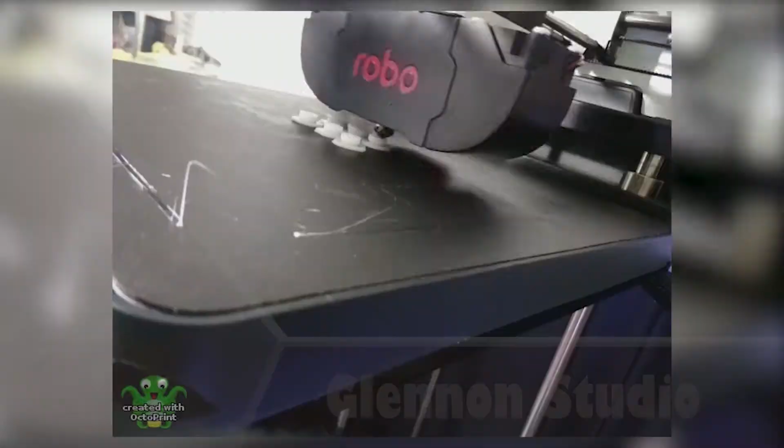What you see in here is the actual print process of printing all the pieces. Some of them I failed, some I reprinted, some I addressed. I ordered the electronics I needed off of Amazon.

I'm not using the same components that they use in the OpenRC F1 series. I'm using similar parts, obviously. It was just easier for me to source them on Amazon than on a website where I'd have to create a login and all that.

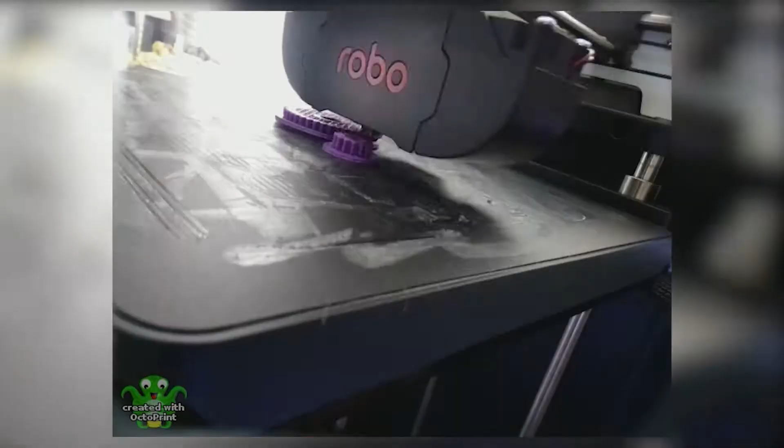So with that said, the engine I picked is a smaller engine than what they're recommending, and this is where I'm going to run into my first problem. Let's talk about that as soon as we're done printing everything.

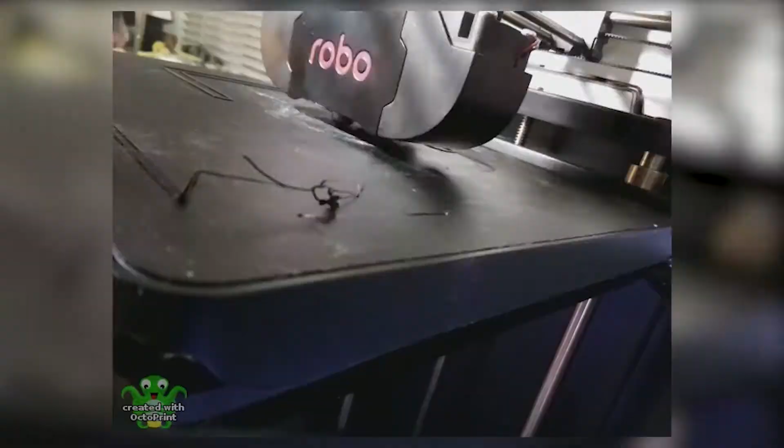Jumping into Fusion here. Unfortunately, like I said, the engine I chose was a smaller engine, so it does not match up with the engine mount that they have.

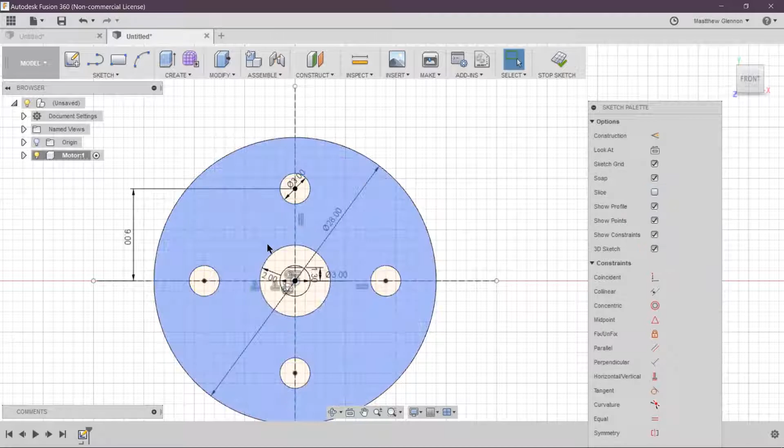This is where one of my first frustrations with this project is going to come into play. I wouldn't say frustration, but concern. The engine I have is a bit smaller, and it doesn't fit their configured mount.

So what I'm doing here is building the engine, so I have a reference point to work from. Obviously this is just a mock-up - it's not critical, but it is important that I have a good reference to work from.

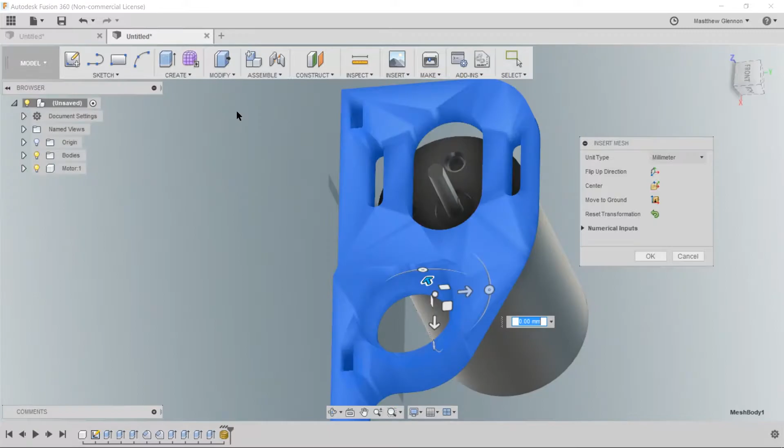Now I'm bringing in the component that I need to redesign, and I'm going to end up having to recreate this piece to get everything lined up.

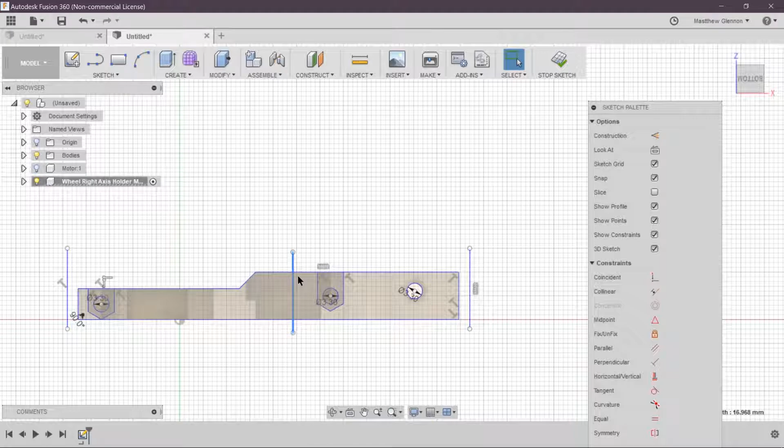My concern here is that they don't have any source files to work with to make these adjustments. The concern will end up being whether the axle is lined up straight or not. That's my only issue here.

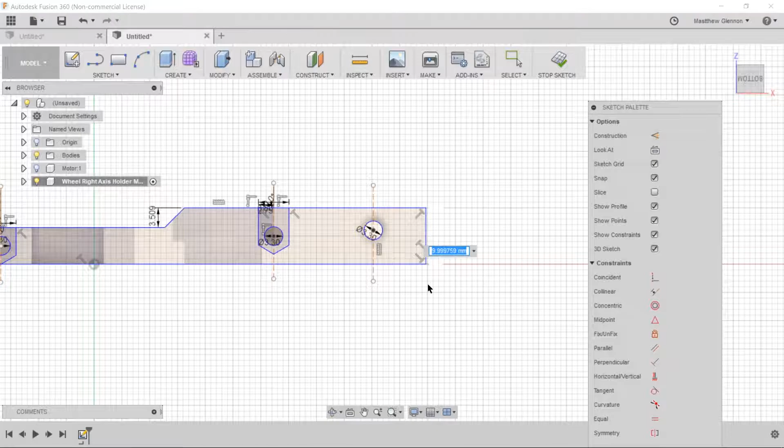The only thing I can do is live with it and go with what I got, and that's what I'm going to do. Luckily, in the end result of this, everything came out perfect after the second round.

I got the hole for the axle lined up pretty nicely right off the bat. That didn't look like there was much of an issue there. Obviously it's hard to tell either way if you're very little off or not. We'll just live with what we got.

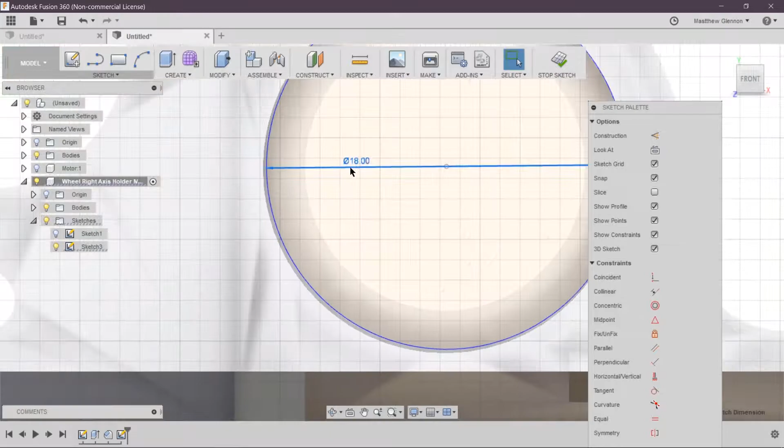Then the next issue I have is how to set up the motor mount to work with the components that I have. So we'll let that run, and I'll go over the end results of this part at the end of this part of the video.

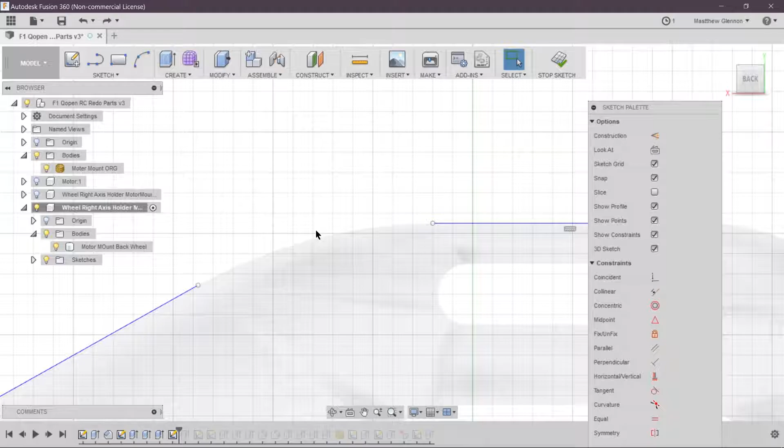Now that we have our car printed, everything printed, let's take a good look at everything here. So everything looks pretty good printed here.

We've got the cover. I already put the camera mount, whatever they call it, on top, which just slides in and locks into place, which is nice. I don't want to fiddle with that because you don't want the plastic wearing down.

Now, the components I chose, we'll look at that in a second. So the pieces look good - I used a raft, so I sanded all the roughness down, as you can see there. On those, that's the nose piece.

Now I ran out of screws, so I'm waiting on some more screws. So I have some temporary screws in some parts and areas and not others.

So let's move all these components out of the way, and we'll take a look at some electronics that I've got. And we'll take a look at that motor mount while we're at it.

Alright, so these are all the pieces. They're shifted out of the way. Alright, so this is where we're at on the build.

I've got a temporary screw in both the back wheels. Got only one done in the front because I have temporary screws here and at the bottom. And if I try putting the wheel on, it won't fit properly.

Alright, now if we look at the engine here, they really didn't design enough space to work with different engines. I'm going to run into a little bit of a tight space here with this particular engine. So I might readjust how I have the engine placed in, because having this far back hitting the wall is not the best thing to do.

Alright, so I'm using a smaller engine than what they particularly use. Some people might actually want this - like if they're making this for their kid or something, they want the most powerful thing that they can get their hands on. Alright, so with that said, let's take a look at the other part that I ended up redoing.

I redid the gear. I ended up putting it upside down. I was having problems, so I clipped some of that off so the wheel wouldn't be in the way.

Things I had to pay attention to was this curve up here, making sure the screws stay flush with that so nothing interacts or gets in the way of each other. Alright, so that's the engine.

I'll give you an idea of what it is when I get in the description. It's a brushless DC motor. Put the wheel so it doesn't fall. This is the controller that it came with. So we've got a T connection for the battery, our standard servo connection, and 3 wires going to the motor.

The other thing I picked up, just in case I needed it, was, hold on, I buried it with the parts to the car, this little programming controller. This little guy to program the controller here.

So we'll open that up, take a quick look. From what I can tell, you got a few buttons here. This guy plugs into our friend here, you just got to make sure everything lines up properly. And yeah, that should fit, but apparently it does not. Interesting, you'd think that, considering that's supposed to be a standard fit, that would work fine. Whatever, I'll take a closer look at that later.

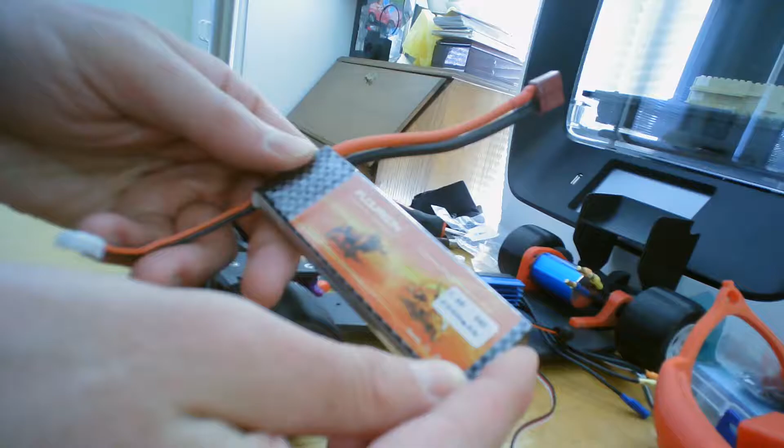Then the battery I picked up was this little guy here, because anything bigger was going to be really tough to fit into the car itself. It's a 2200 milliamp hour 2-cell battery. It's got the T connection, so I don't have to worry about adapters. I'm waiting on the servo and the controller and more screws, and once I have all those, I should be able to do that.

And in comparison, actually, while we're at it, I originally picked up this big beast of a battery, and that was my mistake, it doesn't fit. It's not going to fit into the car, so I ended up purchasing this little guy. I'll save that for another project.

Now, to charge everything up, I picked up this guy here, the B6. I don't know how good it is. I've not used any of these since I was a kid, and they weren't this fancy.

So let's move the car out of the way, and we'll take a quick look at the charger. Excuse my chair. Excuse all my little parts and bits and pieces for the car.

Alright, so we'll take a look at it. I haven't really opened this. I haven't really looked at much of it.

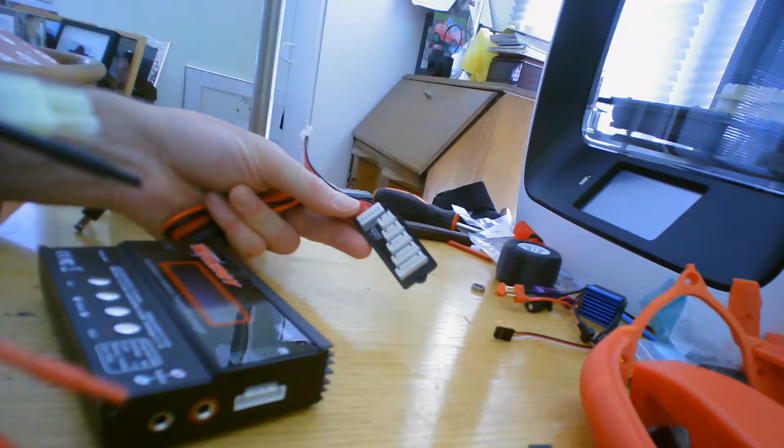Interesting, so we have this little adapter board for, I guess, different plug styles for charging, is what I'm assuming. Gator clips, that's interesting, probably has some use. That goes with that guy, so whatever. And I don't actually see, oh no, I don't see a T connection.

Then we have this monstrosity to address a variety of charging types, but I don't see a T connection, unless that's this. Oh, there it is, it had a little cap.

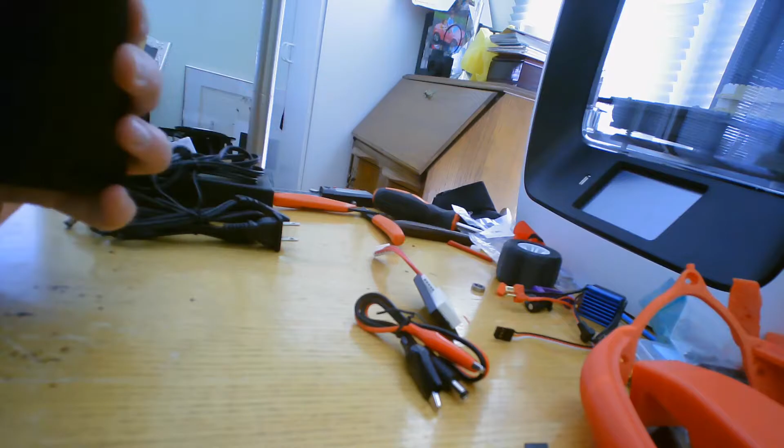Alright, cool, so I guess all we do here is plug this stuff in on the side here. Cool, and I guess this would normally go here if you need it. Again, I have no clue what that's used for, so don't ask me.

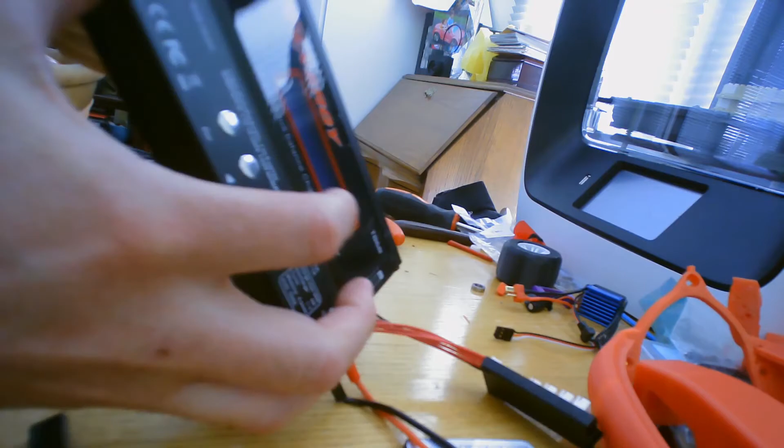Oh, that's interesting, so apparently, and I don't know why that is designed that way. Let me undo this. Why would you want this to plug into mains? See, this is designed to go right here, and then you can clip it into a main power. Why would you want that, especially when they're providing you with a nice quality brick like this?

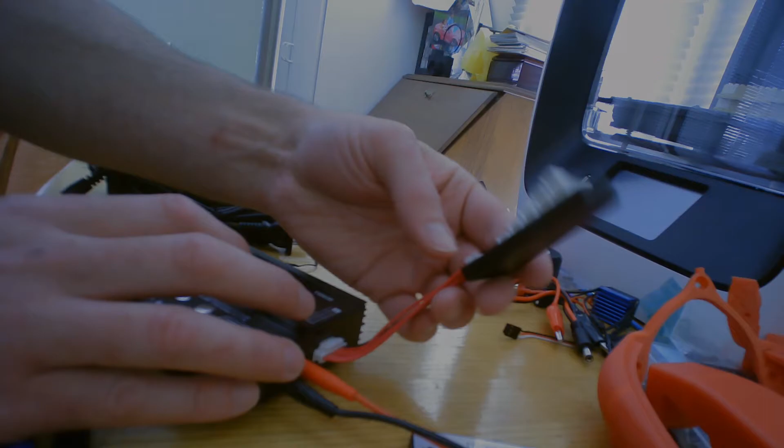So most likely I won't be using that. And as far as the adapter goes, I'm not going to need that, so I'm not going to even worry about it. Alright, so that's my charger that I've got for this. All I'm waiting on is the controller, screws, and the servos. Once I have all that, we'll have the thing put together, and then we'll be able to test everything.

Alright, and with those thoughts, we will, well, I guess we're starting the race. And it's going to take me probably another month to have everything together. Yeah, which is awesome, but that's the reality of it.